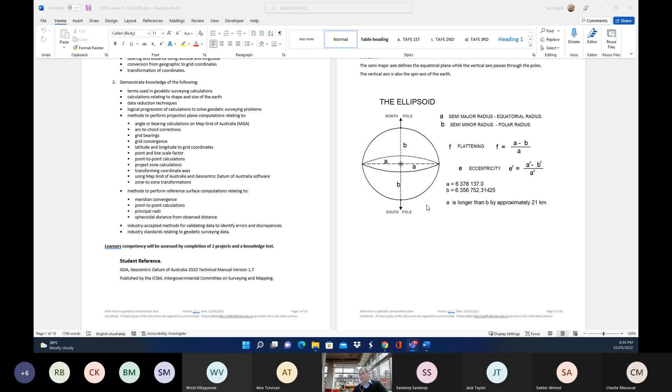By way of revision, we've gone back to our notes and our ellipsoid, which was our starting point. We used an ellipsoid to fit the shape, to approximate the shape of the Earth, and to create a coordinate system usable for position anywhere on Earth's surface. It had certain parameters defining its size, shape, and position. It was geocentric, meaning the centre was placed, mathematically, at the centre of mass of the Earth, which is defined by gravity measurements all around the Earth's surface.

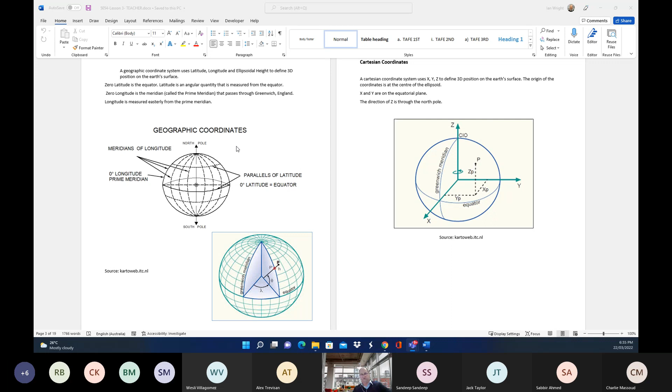The coordinate systems based on this ellipsoid are two: geographic coordinates and Cartesian coordinates. Geographic coordinates are made up of latitude, longitude, and ellipsoidal height, and are three-dimensional. Cartesian coordinates are made up of X, Y, and Z, and again are Earth-centered coordinates. So any position on Earth's surface can be described in latitude, longitude, and ellipsoidal height, or in Cartesian coordinates of X, Y, and Z.

Having identified our 3D world-based coordinate system, we sought to convert that into a way we could lay out our coordinate system on a flat piece of paper, because maps over time have been on a single piece of paper you can lay out on a desk and look at.

The first attempts created distortions in the maps, and there were various alternate ways of doing it, until finally they decided on the transverse Mercator projection - transverse meaning sideways across. It's similar to a cylinder, fitted to the ellipsoid and then rolled out. It only touches the ellipsoid in one place, one of the meridians of longitude, and then it's rolled out. So this was the transverse Mercator projection.

It's actually fine physically - you can roll that out - but behind the scenes there's a lot of mathematics that converts those ellipsoidal coordinates into flat coordinates. That process is called projection, and our projected coordinates are grid coordinates on a flat 2D map.

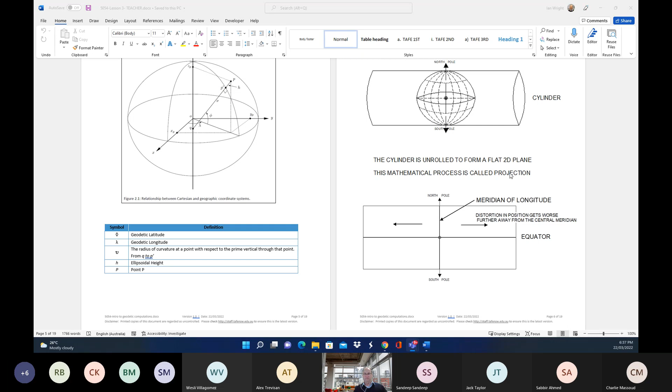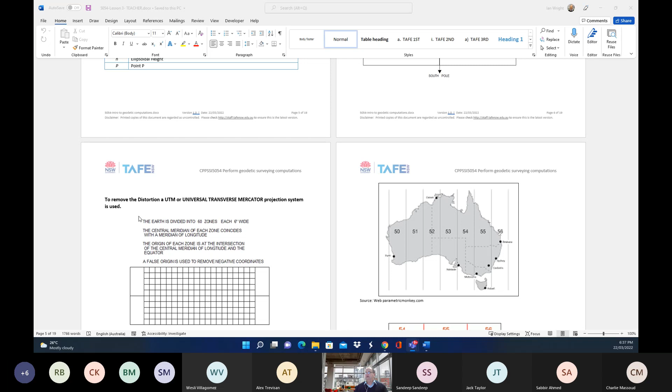The transverse Mercator projection was further amended to remove distortion, becoming the Universal Transverse Mercator projection, which is what we have today. That projection creates the zones across the Earth used by all countries.

In Australia, there are 6-degree zones across 360 degrees. Apart from the zones, the centre of each zone is fixed at a meridian of longitude, and each zone also has a false origin to ensure the grid coordinates in each zone are not negative in the southern hemisphere. There are various parameters that pull that together to define that.

The longitude of the initial central meridian, which is zone 1, is 177 degrees west longitude - so that prime meridian is actually halfway around the zones. Zone width is 6 degrees, central scale factor is 0.9996, and false easting and false northing are written there in the diagram.

This UTM system has been used with the GRS80 ellipsoid - Geodetic Reference System 80 ellipsoid - and GDA 2020 latitudes and longitudes to define the Map Grid of Australia 2020.

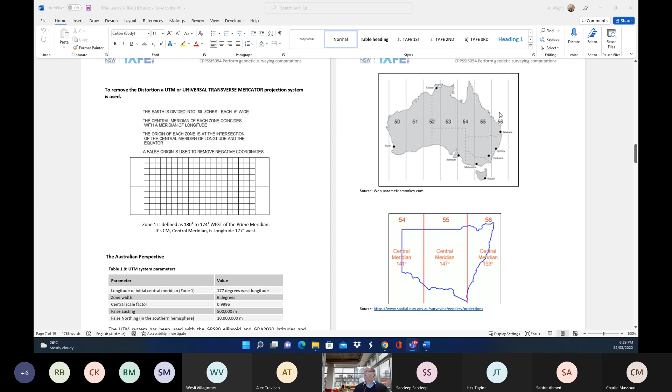We looked at the zones, how they affect Australia, and then how they affect New South Wales, where most of our work will be. We looked at a blow-up of our zone 56. The central meridian is 153 degrees longitude. The true origin of coordinates in our grid system is the intersection of that meridian of longitude and the equator.

But in the southern hemisphere, that would cause negative coordinates. So for all zones across Australia, we have a false origin, which gives us positive coordinates anywhere in that zone. These parameters are replicated for every zone, so every zone has a false origin.

Every zone has a central meridian, which is a particular meridian of longitude. So it's important that we're always aware, when working in grid coordinates, of the zone, because we could have the same coordinates but in a different zone. So always be very careful of that.

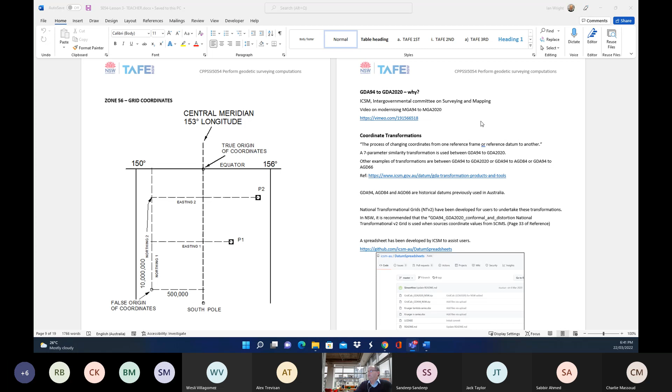Last week we watched a video on the reasons why we're moving from GDA94 to GDA2020. Mainly it was because of plate tectonics - the movement of the Australian plate over time.

Then we looked at coordinate transformations. This was the process of changing coordinates from one reference frame or datum to another, done by a similarity transformation.

We looked at GDA94 to GDA2020, and we downloaded a transformation conversion Excel file, which we used to do a calculation as part of Exercise 1.

And in the end, we try to get a feel for the error on the Earth's surface for some of the differences that are apparent between using the Excel spreadsheet to calculate GDA 2020 and comparing that to the GDA 2020 values from SCIMS Online. I made a note that's important: the transformation spreadsheet uses a conformal projection that does not include the distortion.

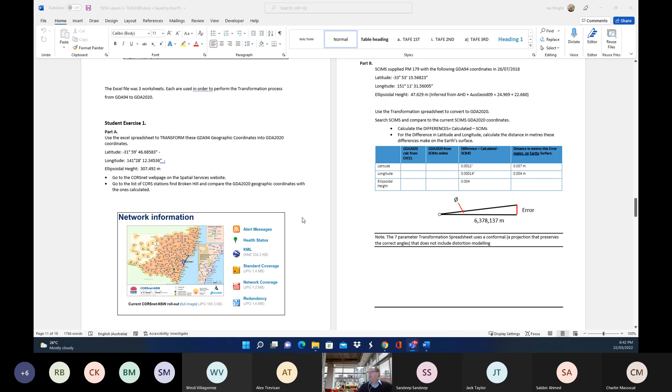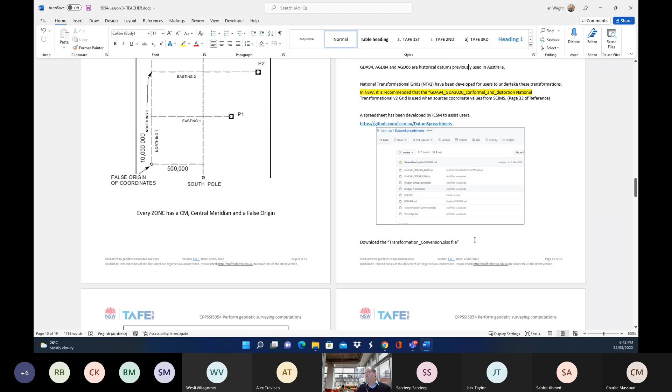There was a note here that it is recommended that in New South Wales, the transformation model used is both conformal and distortion-corrected. The one we downloaded for our exercise was only conformal, and didn't include the corrections for distortions, and that's why we had some slight differences.

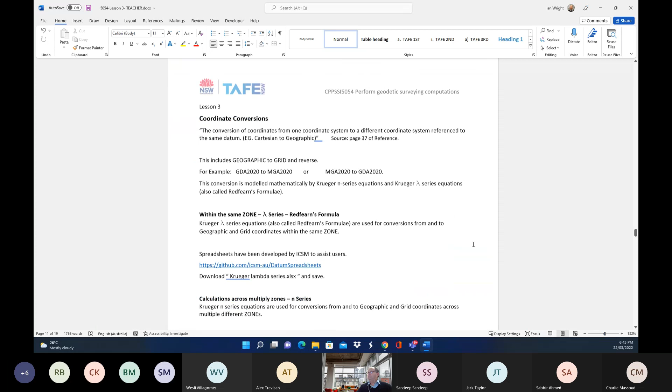So this week we're going to introduce coordinate conversions. This is the conversion of coordinates from one coordinate system to a different coordinate system: Cartesian to geodetic, to geographic, geographic to grid. Before, the transformations were from geographic in one datum to geographic in another datum, and they were called transformations. Coordinate conversions are when we convert from a coordinate system to a different coordinate system.

So MGA 2020 is a grid system, and GDA 2020 is a geographic system - different sorts of systems. We've got some formulas coming up that we're going to use to convert coordinates, and we'll see how they're being used.

This conversion is modelled mathematically by Krueger n-series equations and Krueger lambda series equations, also called Redfern's formula. There are two formulas, two spreadsheets, used in different circumstances. If we're in the same zone, and typically mostly we are - our survey's in a pretty big area - we would use this Redfern's formula, the lambda series. The Krueger lambda series equations, also called Redfern's formula, are used for conversions from and to geographic and grid coordinates within the same zone.

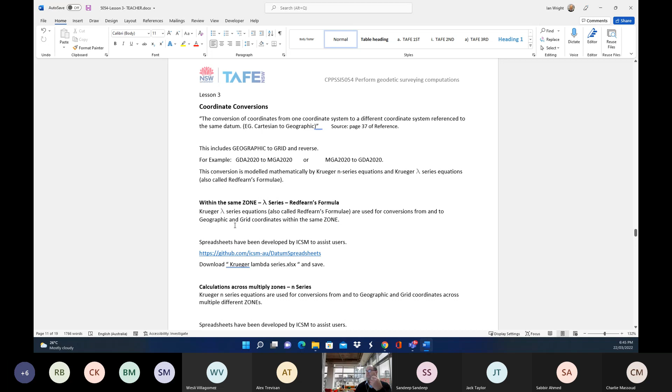We can download that - I've asked you to go to this website and download it. Just before we do, we'll have a look at the other one because we want to download that as well. If we're doing calculations across multiple zones - hard to imagine why, perhaps for some scientific reasons, if we want to do calculations across Australia - we would use the Krueger n-series equations for multiple zones. So you can download both, but we're going to use the lambda series Excel file for a series of calculations.

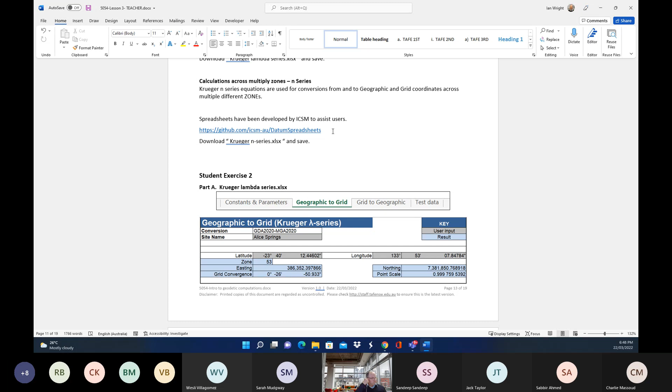Again, this is the lambda series, and I've just done a screenshot from what you see if you click into the geographic to grid section. They've got Alice Springs there as a sample. Similar to the transformation spreadsheet we're using, the user input is in grey and the result is in blue. So it's a matter of entering values in the grey and then clicking over to the grid, having the grid values defined for us. So, geographic to grid - the grid values are there.

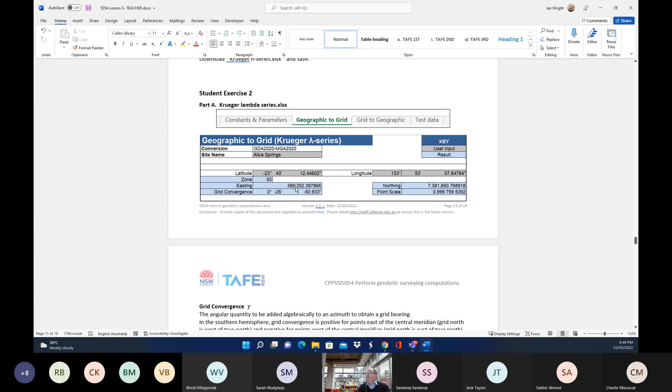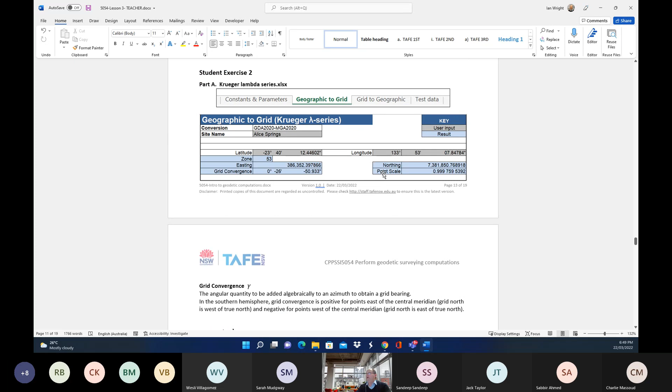If we want to go from grid back to geographic, we use the other one. Now we've got some data coming up to use in that, but before we do, I just want to define a couple of variables that we see here.

It's got grid convergence and point scale. Grid convergence is the angular quantity to be added algebraically to an azimuth to obtain a grid bearing. In the southern hemisphere, grid convergence is positive for points east of the central meridian and negative for points west.

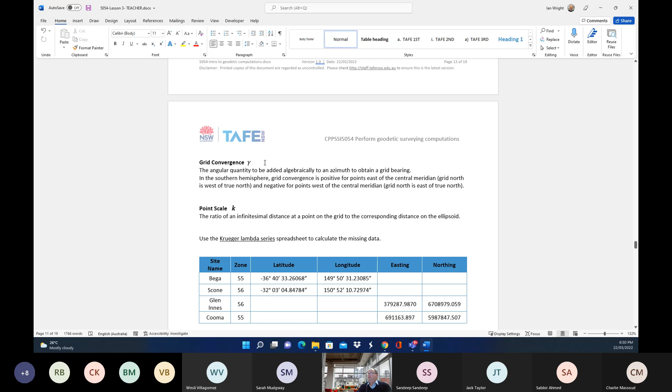Now, where is grid north? Grid north is on the grid, it's just vertically up. When we're on the MGA, the Map Grid of Australia, grid north is parallel to all the other vertical lines. The grid convergence is the difference between true north and grid north.

True north is from the point on the ellipsoid up along a meridian to the North Pole. Down on the grid, there's a slight angular difference. If we project that true north direction, there's a slight angular difference between that true north direction and grid north, and the difference is the grid convergence.

It varies depending on which side of the central meridian you're on. On the right-hand side, the meridians curve from the bottom out and then back in. On the left side, they curve from the South Pole out and then back in towards the top. That's why it's positive to the east and negative to the west.

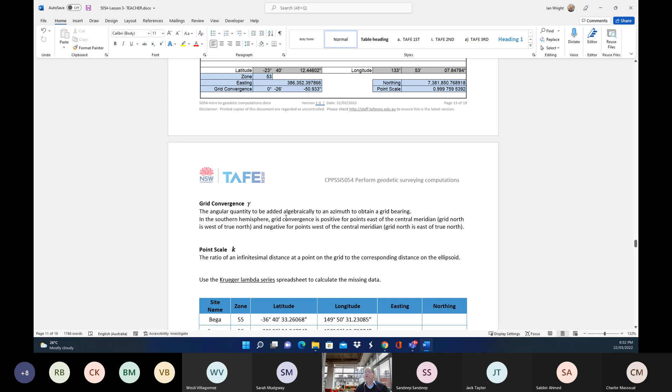In some weeks' time, we'll get right into the calculation of a traverse on the grid, and there's a whole lot of calculations involved in that. We're just heading our way there.

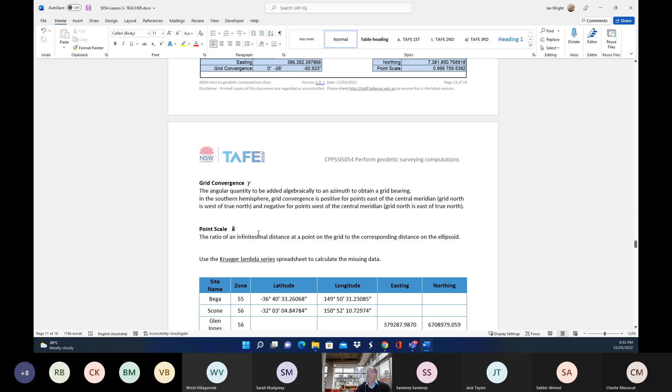Point scale is the ratio of an infinitesimal distance, so the values are very, very small, at a point on the grid to a corresponding distance on the ellipsoid. It's a very small value, you just need to understand what it is. It does come up from time to time, and we'll see it in various calculations further down the track.

Okay, so I've got some data for you. Once you put it in, come up with some values for easting and northing for Bega and Scone, and then use the same spreadsheet but in the opposite context, going from grid eastings and northings back to latitude and longitude.

And where do you think we might check our values? Let's just put a note in there. I'll give you a few minutes to do that.

So we're just getting used to doing some calculations. This helps us understand the coordinate systems, the different coordinate systems, and how to move between them.

Now I'm going to write in red what I get, and I want you to just confirm it, whether you think it's right or wrong.

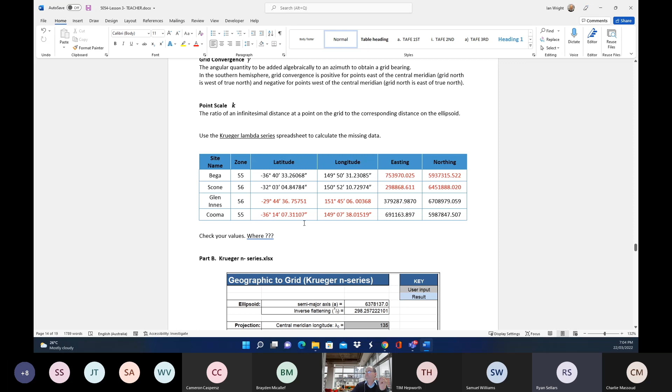Just quickly on that, say if you're out rural and you set up your base on a PM that doesn't have good coordinates, like it hasn't been fixed properly - what if you let your base run for a long time, and then those coordinates are going to be different to what your PM's reading?

Most rural surveyors would also have an antenna to be able to pick up the signal for longer distances. But typically in the country, the big issue with CORSNet is phone coverage. The further you get away from phone towers out there, if you lose your telephone signal, you can't use cors. So even though New South Wales is generally pretty well covered, there's big gaps that probably still apply, certainly out near the west.

And for that, you'd probably have to go back to a base station and a rover, with the base station set up over a known point - a PM or SSM, good quality - and then broadcast a longer distance. So in rural areas, where you want to be connecting to your rover over a couple of Ks, they set up an antenna to boost the radio signal over a longer distance.

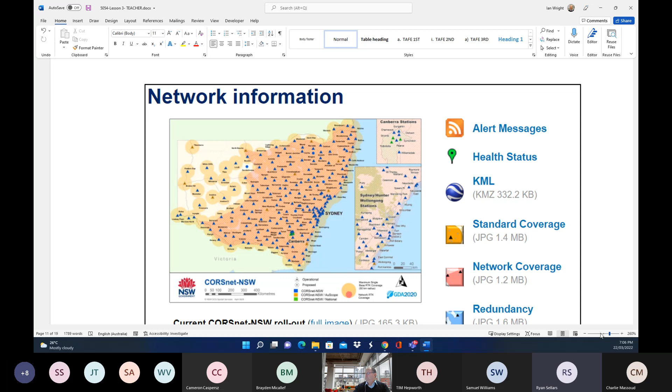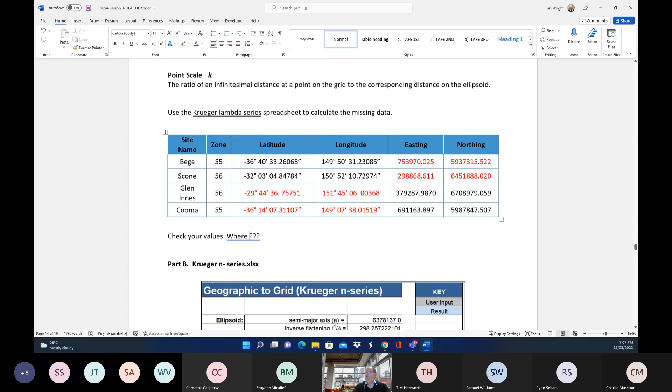So we looked at, we've used this Krueger lambda series, and we've done a few calculations. Remember, this is used for calculating within one zone, so we can't use calculations that go across zones. So this is the second one, same data, and I thought we might just replicate it and see if we get any difference. Compare the results of the two spreadsheets.

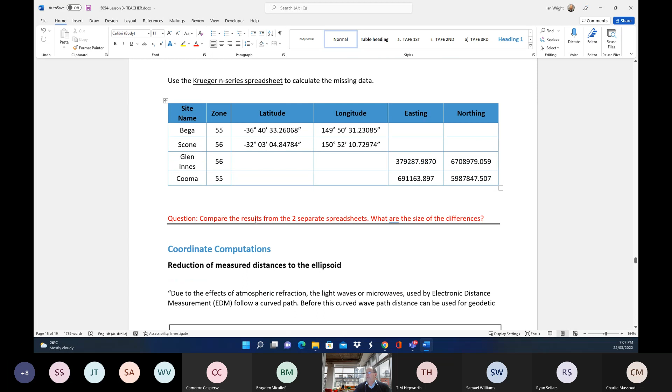What are the size of the differences? Use the second one and plug it in and see what we get. I think it'll be probably pretty close, but let's see.

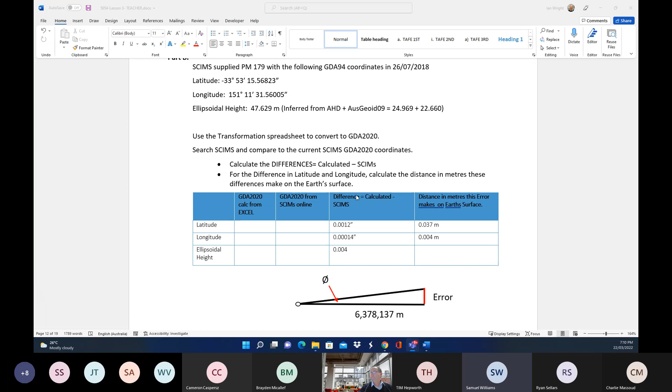Yeah, I think I've screwed up in my understanding of this table and changed things that didn't need to be changed without understanding how this table actually works. So that's all right, just so you're only entering the grey area. So the blue is sort of calculated for you, yeah?

I just saw that there was a field for the central meridian, and I saw that we had a given zone, so I changed the central meridian to that zone. It doesn't seem like I should have. Oh, I'll just change it back.

Yeah, so we do have the central meridian for the zones, because if we look at our notes here, that's why I pan back up the top. There we go. Central meridian for zone 55 is 147. Central meridian for zone 56 is 153 degrees.

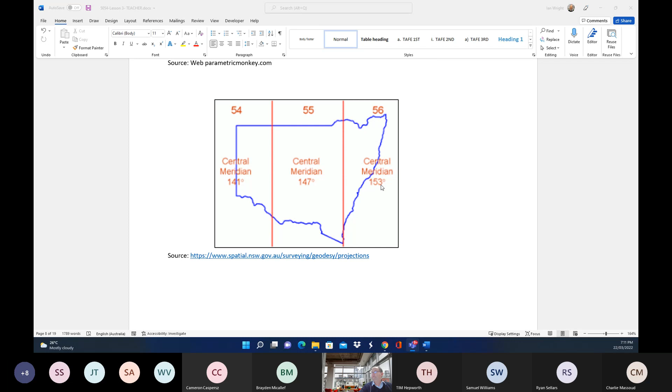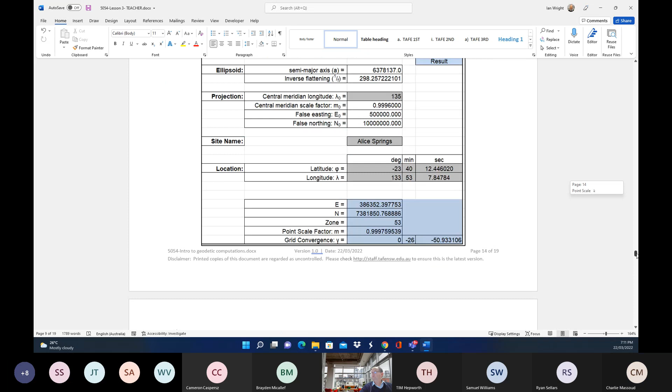So it being set to 135, are you not able to change it? So on the projection on the actual grid, it's set to 135. Well, that's grey, so it says user input. Yeah, I think that's why he changed it, and that's why probably everyone's getting different results. Although I'm getting the same result as what I assume everyone else would be getting if you hadn't changed it from 135. Oh, I think you've got to change it, don't you?

Makes sense. All right, time to do the last question all over again, everyone.

So, bigger. So I'm doing it off to one side here.

And I'm getting pretty well the correct results - easting, northing correct, zone correct. So I imagine, even though it's recommended only to be used when you're using multiple calculations in combination, I imagine it's fine if you're just picking up one point, so it seems to work okay. So I'm getting, for mine... here we go. I put in Bega, latitude, longitude, and I get that. I'll just check one of the grid to geographic. Try that.

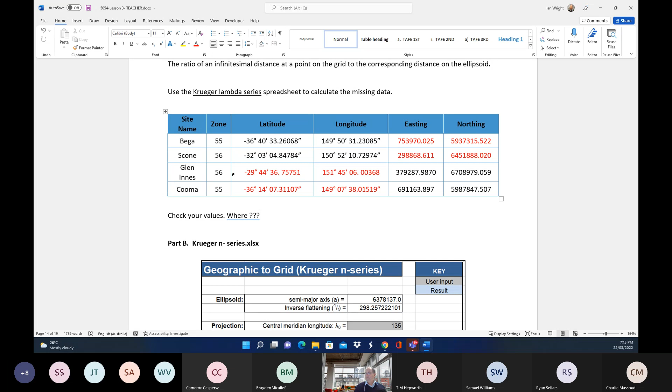Okay, so what's everyone getting? Which question are you asking us for? Richard, so you posted some coordinates, which ones are they for, friend? Good question. So you posted two, could have been the previous ones. No, no, that's Bega and Scone. I believe it's the second lot of Bega and Scone. Yeah, I got the same.

So Richard, I'll just whack these in. So I assume these are what you're giving me. I want everyone to check these. They don't compare really well to the other ones. So that's what we're getting also, but that begs the question, do we bother changing the central meridian longitude now that the zone are different? Hang on, one step at a time, mate. So Richard, these are yours for Bega, is that right? That's right. Okay, so let's go and find it, and I'll share it with you.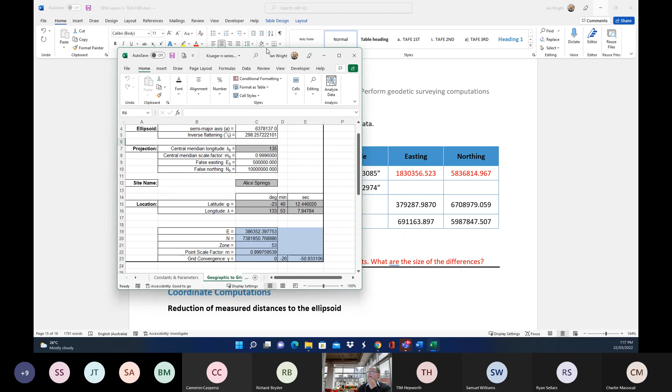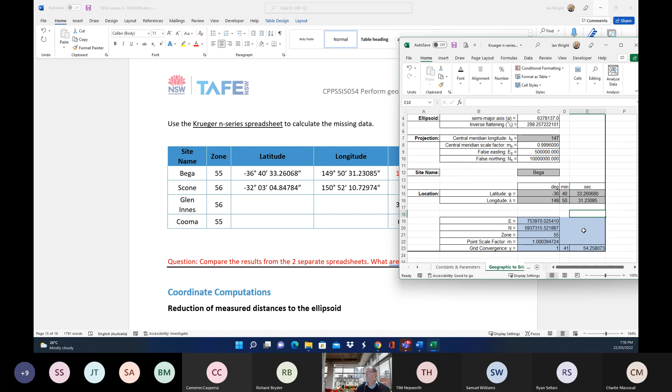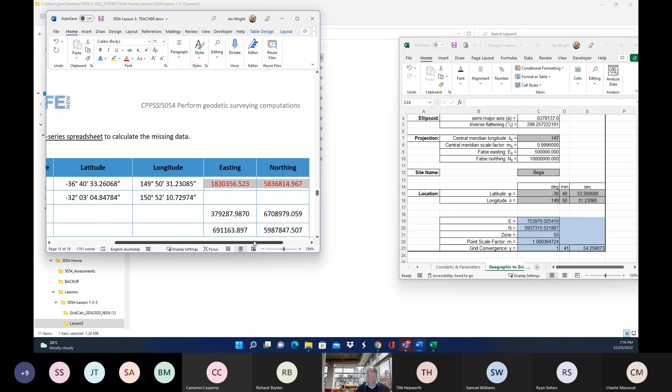Central meridian for Bega is... so I'm getting a little bit different there. And that sort of agrees. So easting and northing for Bega, we come up to here, and that's pretty close. 025, 521, 522, zone 55. Yeah, I see, I didn't change the central meridian. Yeah, user input is the grey stuff. Gotcha, got me.

Okay, so got a few more guys putting in stuff. Tribby looks like he's pretty close. Wesley, is that for the next one or something? So Scone, let's have a look at Scone. And Scone's 56. Central meridian 153 degrees, and 132. 298868, 2988686111, 645, 1888002. Yep, zone 56. Now let's check.

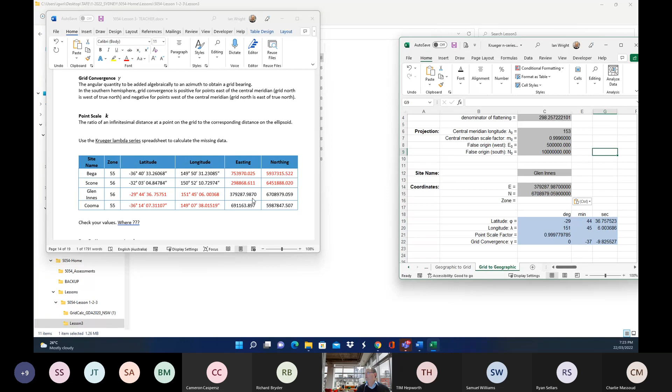And so that should have calculated for us. And there's our, this is from CORSnet, minus 29, 44, 36.7575, 75752. Slight difference. Longitude, 151, 06, 003, 68. It's pretty good.

And we'll check Cooma as well. Cooma zone 55. See where I got the central meridian from? Remember in our notes we had that little diagram of New South Wales - there's the 3 zones that cover New South Wales. So that's where I got them from. So this is Cooma, and Cooma has these coordinates. And we finish up then with minus 36, 14, 073, 1106. So 0311, 07 to 06. And then latitude, longitude 149, 07, 38.01519. Spot on, really. So it works, either one works for what we're using them for.

Okay, well done. Okay. Any questions?

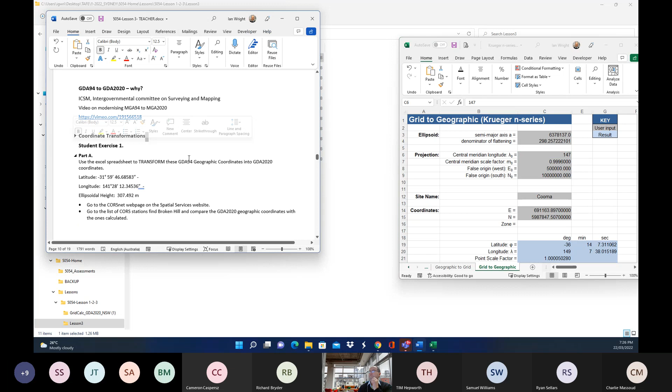Coordinate transformations: the process of changing coordinates from one reference frame or datum to another, for example GDA94 to GDA2020, or the reverse.

Now we have coordinate conversions - converting coordinates from one coordinate system to a different one, but within the same datum. For example, GDA2020 geographic coordinates, latitude and longitude, converted to grid, the map grid of Australia, or the reverse.

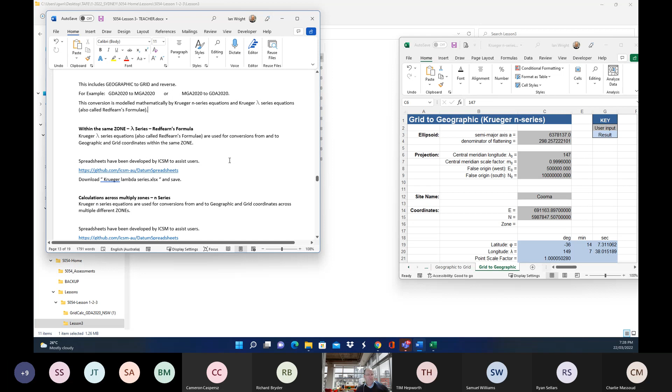There are two types of calculations, and we have this Krueger lambda series which is adopted for calculations within the one zone. So we did a little exercise where we used both methods on the same set of data, and we got the same results, which is great.

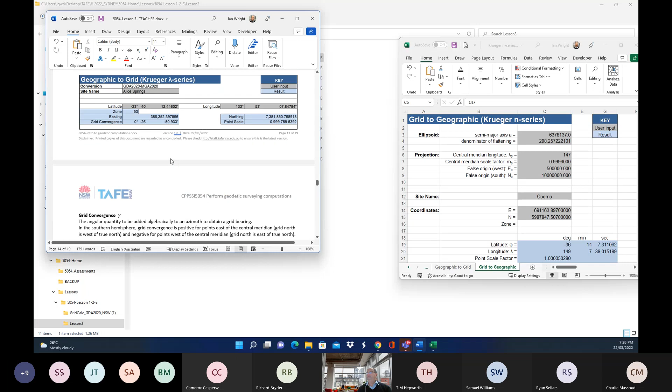So, transformations, coordinate conversions - that's number two in terms of the mathematics we've dealt with. Now I'll move on to the next one: coordinate computations. This will take a few weeks to get it set down and understood properly, so let's not rush it.

Coordinate computations, number one: reduction of measured distances to the ellipsoid. Due to the effects of atmospheric refraction, light waves or microwaves used by EDM - electronic distance measurement - follow a curved path. Before this curved path distance can be used for geodetic computations, it should be reduced to the surface of the ellipsoid by applying both physical and geometric corrections.

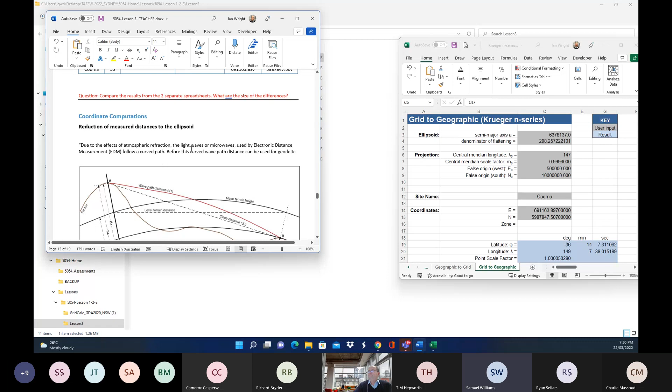Does anyone know what type of light is used by our modern EDM instruments? Infrared and visible - generally for pointing, a laser pointer uses visible light so you can see the dot, but infrared is generally the one used for measurement. It's a light wave at a certain frequency in the infrared range, and I believe it's a set of frequencies so it can take measurements at multiples of ten to get the decimal places.

In the early days of distance measurement, they actually used microwaves - they started with microwaves. Anyway, because it's electromagnetic radiation passing through the atmosphere, temperature and pressure model the atmosphere, and because that varies along the path, we get refraction of the wave.

So in a sense it's bent - we have to take that into account. It's actually a curved path; the distance is measured along a curved path. That's the diagram you see in every geodetic textbook about distances. Here we are at point A and B - let's just pretend there are no instrument heights, we're on the ground. We're at A, shooting or measuring a distance to B.

Our wave path distance, d1, is that curved distance. The straight line connection between the two is the slope distance, so we have little d1, little d2. One is the arc, the other the straight line, is the chord.

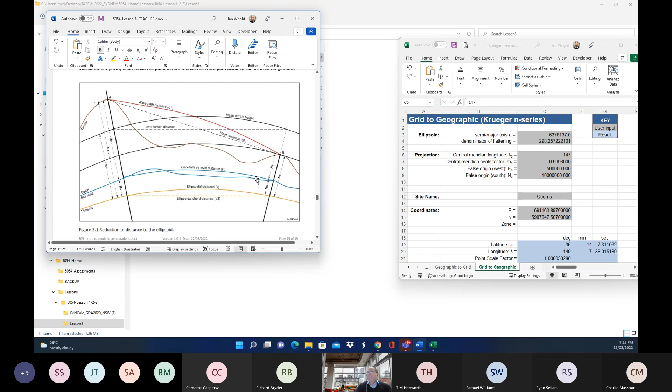So we have capital H, that's the orthometric height, and generally that's the bit that approximates AHD. So it's the ellipsoid minus the separation gives us something that equates to AHD, and that's big H. It's pretty complicated, a bit hard to get your head around, but we'll keep working on it.

Due to the effects of atmospheric refraction, for us it's going to be infrared. Infrared light used by modern day EDM follows a curved path. Before this curved path distance, red, where we've measured the distance, can be used for any geodetic computations, it's got to be reduced all the way down to an ellipsoidal distance S. It's got to be reduced from the red arc progressively in steps down to the ellipsoidal distance. This is a diagram straight out of your reference document.

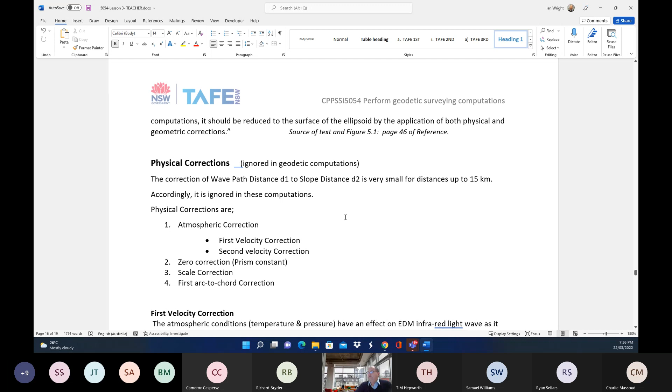So how is it done? There are two types of corrections: one's physical and one's geometric. I've added a little bit of information about the physical corrections, but in fact we can ignore them.

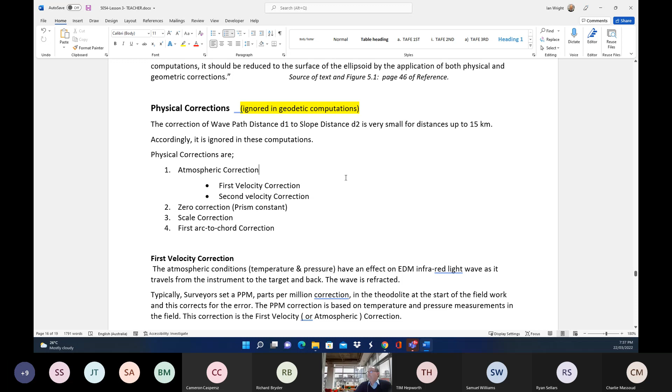The difference between D1 and D2 is very, very small for distances up to 15 kilometres. Accordingly, it can be ignored.

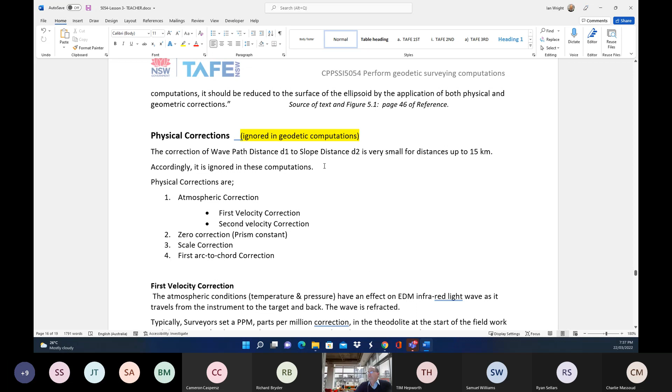The corrections are: we have an atmospheric correction, and I've written a little bit about the first velocity one because it relates to what we do with our theodolite and our parts per million correction. The first velocity correction is when we measure temperature and pressure in the field, and typically modern day theodolites have sensors to sense that and update the parts per million. But go back a few years, you would take a pressure gauge and a thermometer, measure those, and then plug those values into the theodolite to update the parts per million. Parts per million would affect any distance measured by that value, so it's like a scale factor.

That's what we have to note down when we do the baseline surveys. Typically you set your parts per million to 0 on the baseline, and you measure temperature and pressure, and do those corrections separately. We enter them into a template after when we get back to the office, but the theodolite in the field you use, set parts per million to 0.

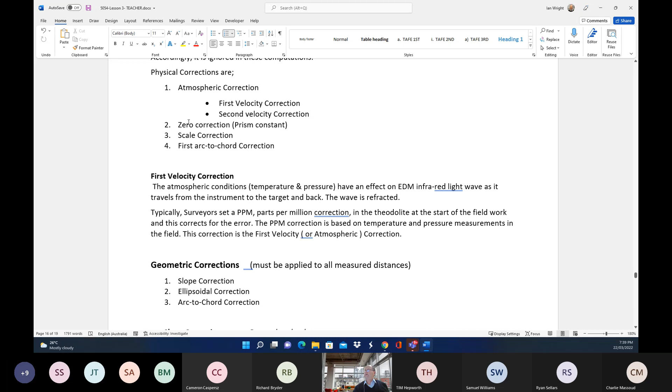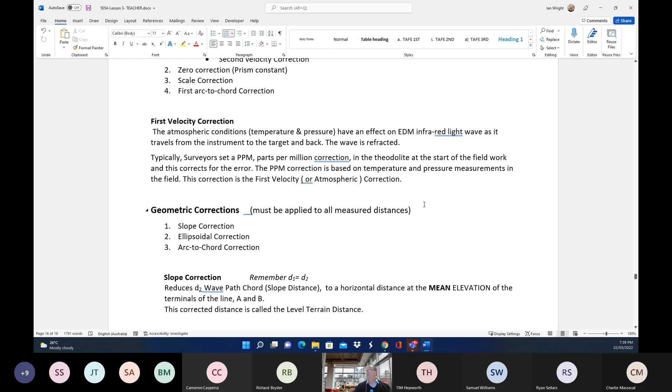So this is just a little explanation of that one. We're not going to talk about those, don't really need to know because they're so small we can ignore them. So the other sort of corrections are the geometric corrections, and these must be applied to all measured distance. We have a slope correction, an ellipsoidal correction, and an arc-to-chord correction.

So the slope, now remember that in reality D1 is the same as D2. The notes refer to a wave path chord distance, so this is the wave path distance, but it puts a little word in there saying chord to represent the straight line connection between our two points. Let's come back and have a look at that. So D1 equals D2. D2 is the wave path chord distance.

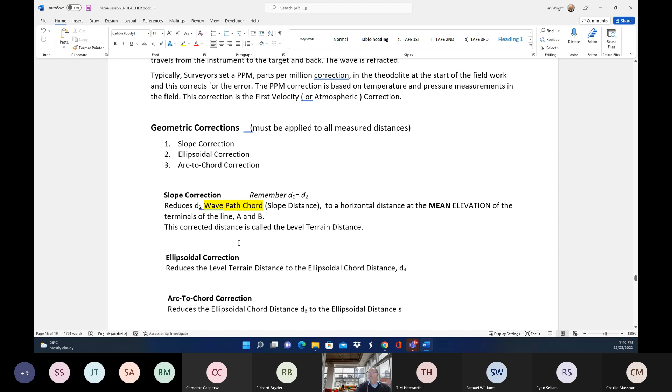So the slope correction reduces that to a horizontal distance at mean elevation of the terminals of line A and B. This corrected distance is called the level terrain distance. So where is that? Here it is - this level terrain distance is this flat distance between A and B. So it reduces the chord down to that.

Now somebody many years ago sat down and worked all this stuff out. We don't have to worry about how they're derived, we just try and understand the process so we can apply it to a survey.

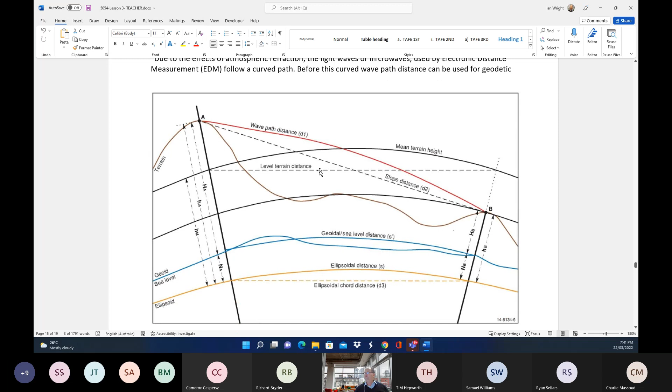So the slope correction is the correction from our wave path chord down to the level terrain distance. The ellipsoidal correction is a correction that reduces the level terrain distance down to the ellipsoidal chord distance. Let's have a look at that - from this level terrain distance, this next correction brings it down to the ellipsoidal chord distance. So the straight line connection, but it's the chord distance - it's not on the ellipsoid, it's the chord that connects the two points that sit on the ellipsoid, the projection of those.

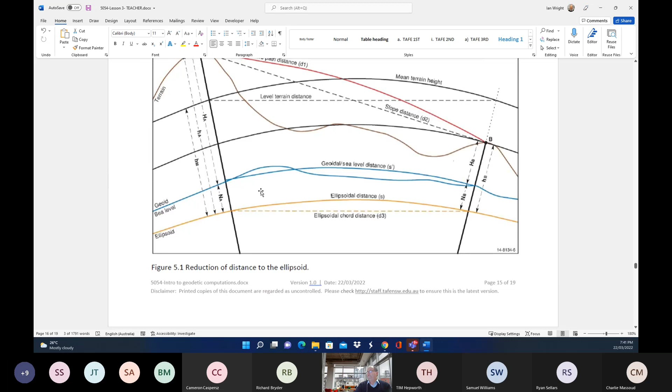And then finally, the arc to chord correction. So chord to arc, in fact - that's what they call it, arc to chord. It reduces the ellipsoidal chord distance to the ellipsoidal distance.

And this is what we're trying to get at - little s. We're trying to start up at the wave distance, the measured distance, and we want to reduce that to an ellipsoidal distance, which is denoted by little s.

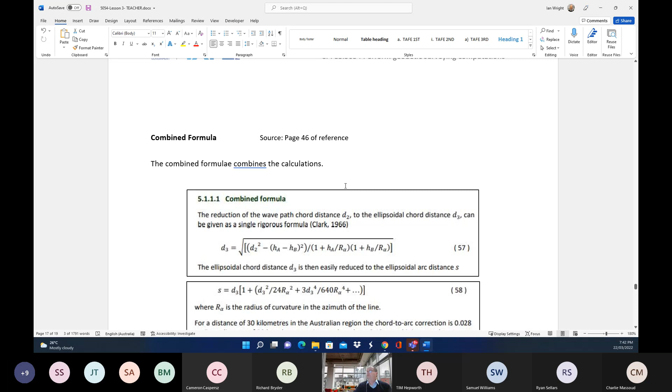How are we going to do that? The notes take you through either this combined formula or the separate formulas for each correction. We're going to use the combined one. And I've just taken an extract so I don't get the formula wrong.

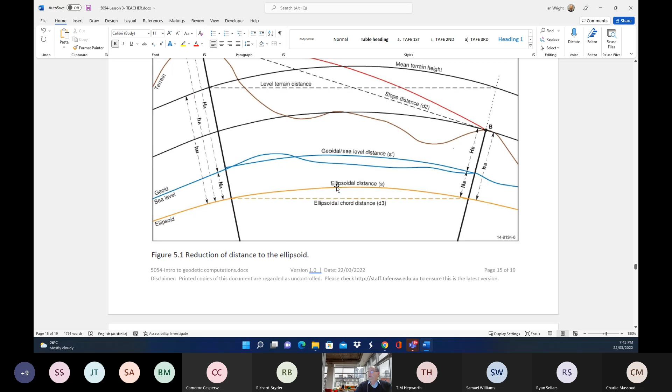This is from page 46 of your reference document. There's two formulas. One calculates D3 and the other one uses D3 to calculate the ellipsoidal distance. So one converts the wave path distance, or the wave path chord distance, down to the ellipsoidal chord, and then the next formula gives us the ellipsoidal distance, which should be a longer distance.

H, so the little h, remember, that's the ellipsoidal height. We have this other constant or variable - it's actually constant for us. It's the radius with alpha as a subscript, and it's the radius of curvature in the azimuth of the line.

For a distance of 30 kilometres in the Australian region, the arc to chord correction is 28 mils for 30 kilometres. So it's pretty small. For a distance of 50, it comes up to about 0.13. The second term of the arc to chord is less than a mil for lines up to 100. So you notice in this second formula there's no second term - it's been dropped out because it doesn't mean anything in terms of the final result.

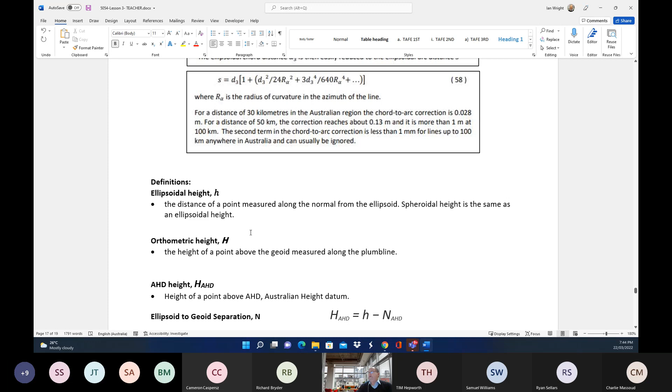So again, let's have a look at ellipsoidal height, little h - that's the height of the point above the ellipsoid. That's what we get out of our raw height, out of our GNSS controller. Orthometric height is the height of the point above the geoid measured along the plumb line - that's big H.

Height above geoid is approximating the height of the point on AHD, because this is approximating AHD through the ground. Remember, in real life, when we go out in the field, if we're using GNSS, we always must measure or connect to survey control marks, SCIMS marks, because they give us the best connection to Australian height datum.

So GNSS gives us an approximate AHD when it uses the geoid, but not as accurate as using the SCIMS marks - good enough for some purposes. So I've added the AHD height here, and then we have the ellipsoid to geoid separation. There's a little formula that relates those three together: the height on Australian height datum equals the ellipsoidal height minus the separation, and that gives us something equating to AHD. You notice I've written the subscript AHD for N - typically it's an approximation, and therefore our height, our orthometric height, is also an approximation of AHD.

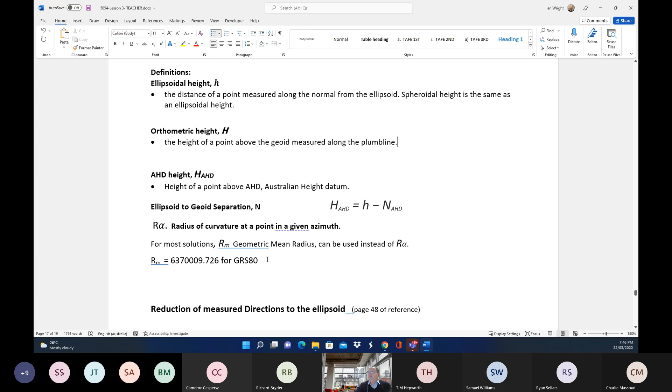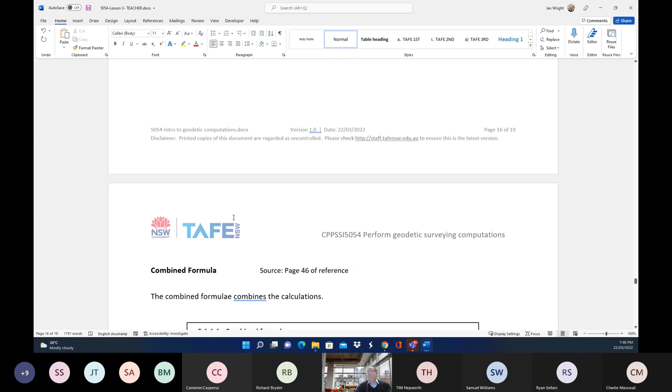Okay, this would be the page. Just bear with me. Okay, we started out - so these are measured distances, converting measured distances. So we set up - we're measuring, you're not measuring 50 meters here, we're measuring a very, very long way, because only at that point do we have to make these corrections.

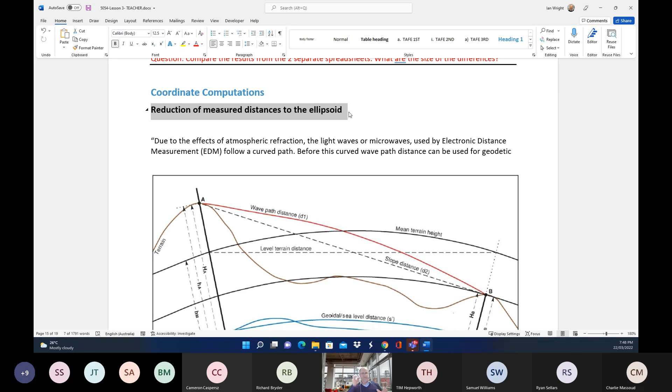We do another unit in second semester, which is conducting geodetic surveying. And then we actually go out and try and replicate the distances for geodetic surveying, which allows us to have some corrections, because mostly we're so limited in being able to make observations. So we used to go up to a couple of different trig stations, do some observations, try and use those. In previous years, we went to the University of New South Wales, got on top of their observation deck on the surveying building. We could see about a couple of kilometres to Sydney Harbour Bridge. There's a light there with a coordinate and various other ones on the horizon. And from that, we can actually apply some corrections.

All right, so now we start up here. These are coordinate computations. Before we can do that, we have to reduce our measured distance to the ellipsoid - measured distances. Now, what about measured directions? There are our angles, yeah, our directions - measured directions.

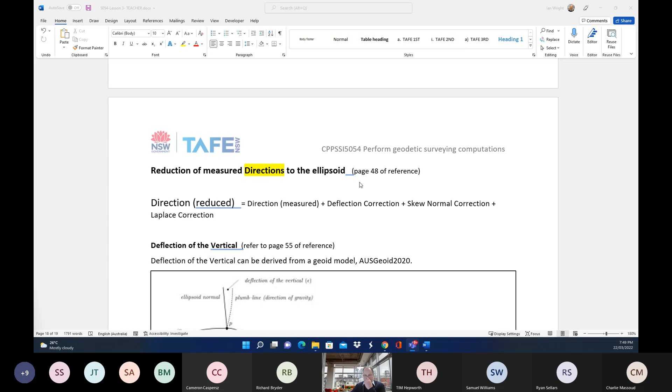Our reduced direction is derived from various corrections. We have our observed direction, which is what was measured in the field. We then have to make a correction for deflection, skew normal correction, and then this Laplace correction. These are all very small.

So let's have a look at this first one. This is what we measure, an angle. Angles, not distances, angles. Directions are like bearings.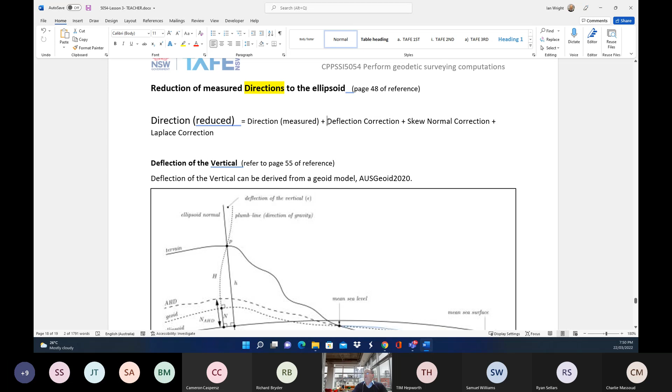Deflection correction relates to the deflection of the vertical. I've dragged this out of the reference, it's a little bit hard to see, but you can find it on page 55, maybe a little bit clearer. Now we're talking about really small amounts that have no effect on 99% of surveys that we do, but as soon as we measure very long distances, it does have an effect.

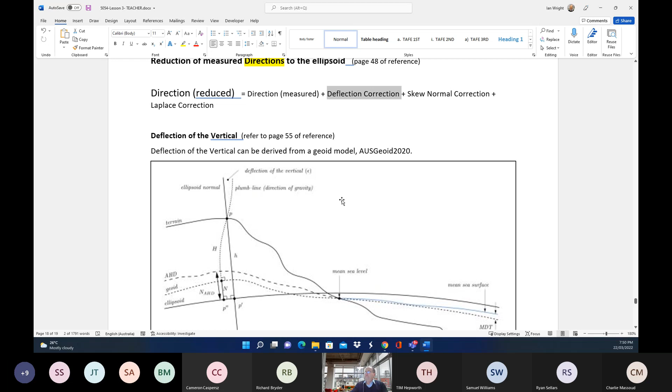And so it's taken into account. So deflection of the vertical relates to, we have a point we're observing on the Earth's surface. If we push a line from there that is perpendicular to the surface of the ellipsoid, and then produce that all the way down to the equatorial plane, that line is the normal to the ellipsoid, or the prime vertical.

But in actual fact, when you set up your theodolite, you put a plumb line on it, a plumb bob. It actually points to the local centre of mass in that area, and not actually down along that prime vertical. So the normal at 90 degrees to the ellipsoid runs through the point we set over and through the telescope all the way up, but it does not actually go down and hit that point. It is square to the ellipsoid. That makes sense, doesn't it?

If the plumb line is the direction of gravity, and the geoid in that area is also defined by gravity, then the line that comes up from the geoid comes up square to the geoid at that point and passes through our observation point. That's actually called the plumb line. And there's a very, very slight difference between the two, and that's called the deflection of the vertical.

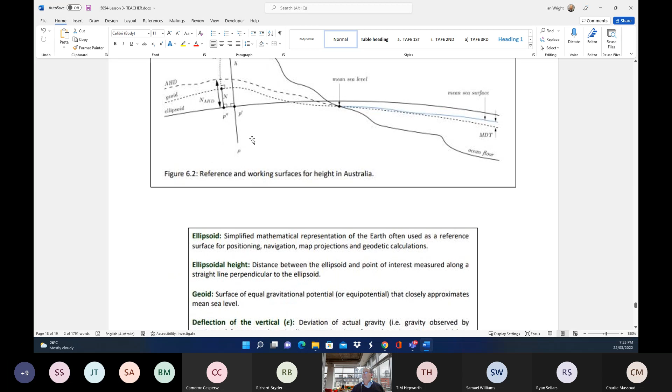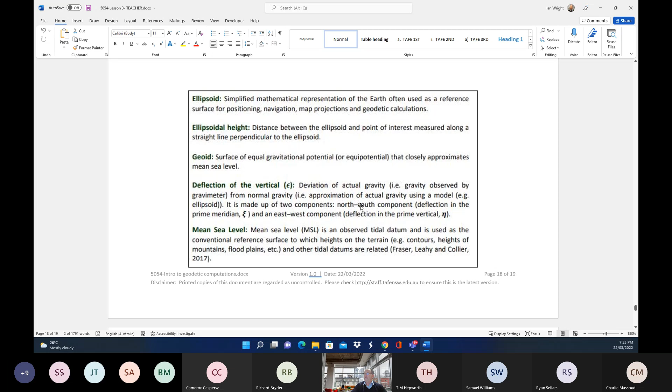Okay, again I've just taken an extract out of the notes to define some of these points. The main one I was after, because we've talked about the ellipsoid, ellipsoidal height, and geoid, the main one I was really after is the deflection of the vertical. It's the deviation of actual gravity, gravity observed by the gravimeter, from normal gravity, an approximation of actual gravity using a model ellipsoid. It's made up of two components: the north-south component, deflection in the prime meridian, and the east-west component deflection, prime vertical.

I don't want to make it too complicated, but it's just the difference between this normal line which comes down and hits the ellipsoid at 90 degrees. If we go back into our notes, all the way back, all the way back.

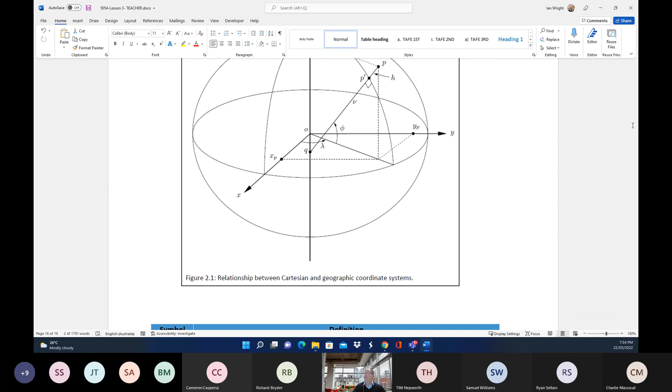And to this little diagram that I've got on page 5 of your notes, you'll notice our point P there. We've got a line from P that comes down through the meridian, sort of directly below it. And then that line continues on, passes through the equatorial plane to hit the vertical axis, and this is how latitude is observed. But it comes down and hits the ellipsoid at 90 degrees. And because it's an ellipsoid and not a circle or a sphere, it doesn't hit the center of the reference frame. It goes either a bit below or a bit above. It'd be very close, but it doesn't hit it perfectly. But anyway, that line intersects the ellipsoid at 90 degrees.

So at that point, though, we have local gravity, which, if we drop that down, is a different location, and so that's the deflection. We push those two up, one's going up that way and one's going slightly to the side of it. Hope you can understand, it's a little bit hard to grasp. I couldn't find a really good diagram.

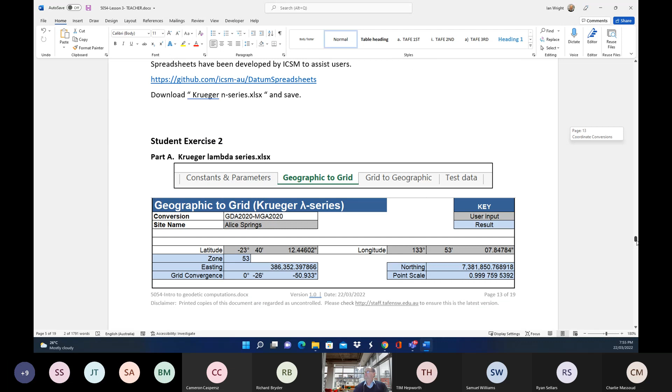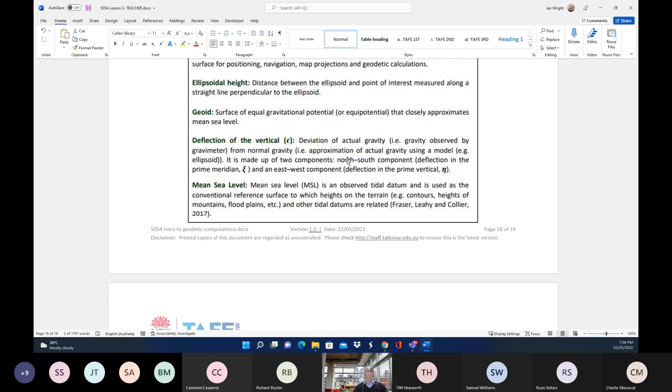And so it's made up of two components, one north-south, because remember it's pointing up, but part of that's deflecting from the normal line, slightly north-south and slightly east-west, if that makes sense. Hopefully it does. I can show you on the whiteboard about it.

Okay, so that was that first one. We've got the skew normal one and the Laplace correction. Let's have a quick look at those. I've just included some definitions for those.

For two trig stations spaced apart, the normals to the ellipsoid, from each point, that line going down, is 90 degrees to the ellipsoid. For two different points, those two lines aren't parallel, and because of that there's a small correction to be made, but it's very small.

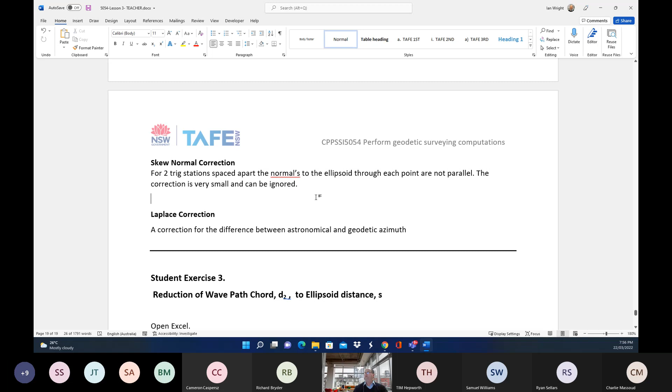And finally, this Laplace correction corrects the difference between astronomical and geodetic azimuth. When we talk about geodetic azimuth, that's in terms of true north. Astronomical azimuth is actually observed in relation to the stars, and I guess the definition.

Sorry, I'm going to confuse myself and confuse you. I'll try and explain it, but we're just going to leave it like that. It's based on azimuth from the stars. When I was at university, we were able to determine latitude and longitude by observing certain stars in the southern, eastern, or western sky. Having done that, we should be able to define zero, and that would be not true north, but some sort of astronomical north.

So there you go. Okay, and we're going to finish up today with a little exercise, where you sit down and create a worksheet that reflects those two equations. I've got some input there to test it out, see if it works for you. So the two equations I'm talking about are...

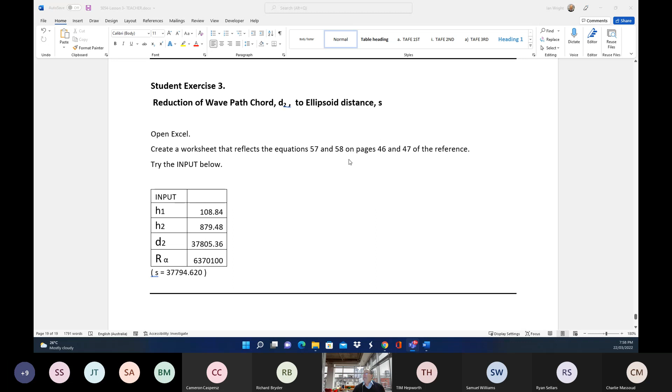These two, yep, that one and that one. So the R alpha is constant, I'm giving you that value. The little h, little hA, little hB are the ellipsoidal heights of the two points.

And that's about it, a few little calculations in Excel. You're all experts at Excel now. So once you've got D3, you then have to use D3 in the second formula to get little s. We're trying to get little s.

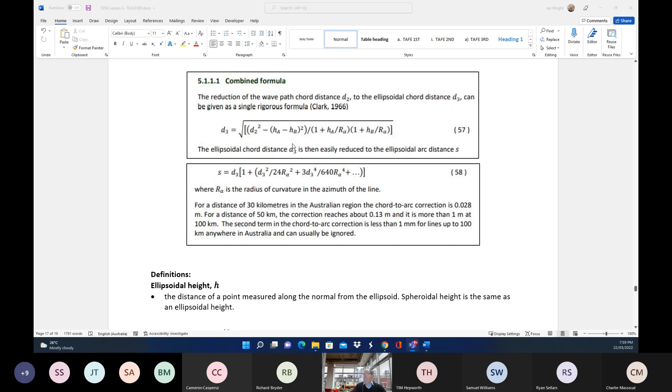And I've given the answer down there. I'm hoping that's correct. I'll pick that up. So we'll see.